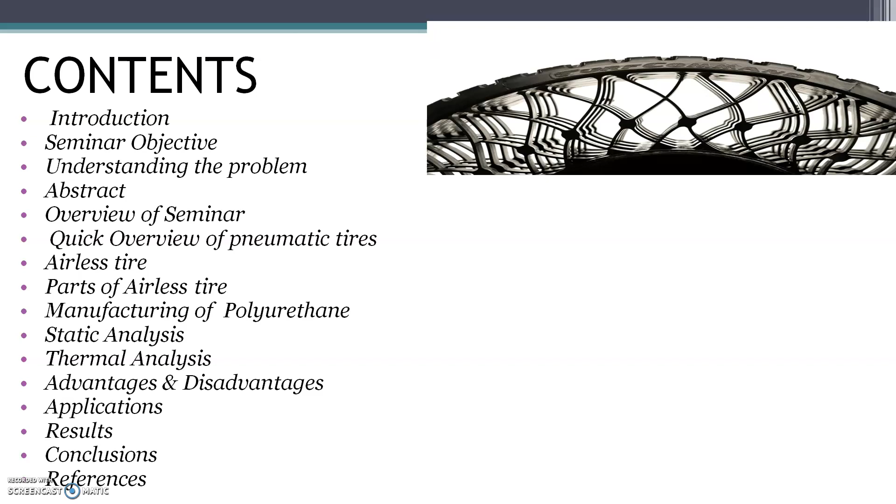Introducing the topic, firstly we will go through the invention of the first car, made by Benz in 1886. With development of the car, the tire industry also developed. By 1888, the car was fitted with metal tires covered with air-filled rubber. This was the beginning of pneumatic tires, and as the industry progressed, treads were added in 1905, synthetic rubber in 1931, tubeless tires in 1947, and radial tires in the 1950s.

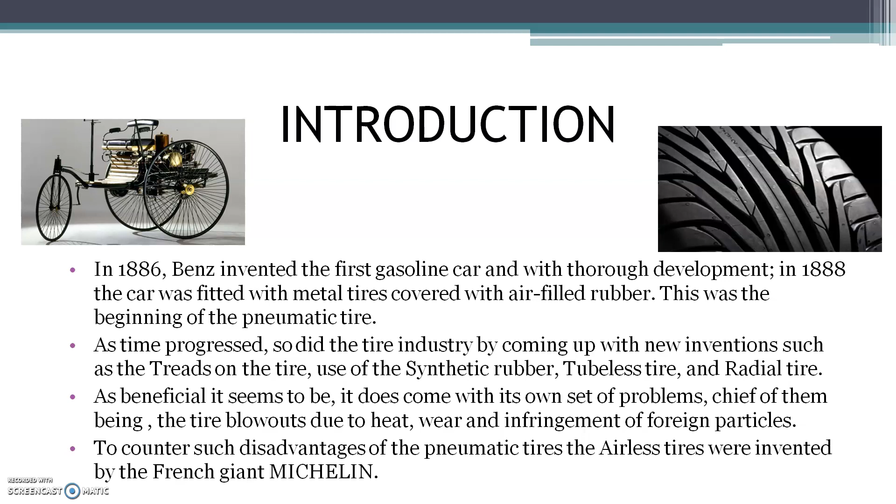But as beneficial as it seems, pneumatic tires do come with their own set of problems, chief among them being tire blowouts due to heat, wear, and infringement of foreign particles. To counter such disadvantages, pneumatic tires were replaced with airless tires by French tire giant Michelin.

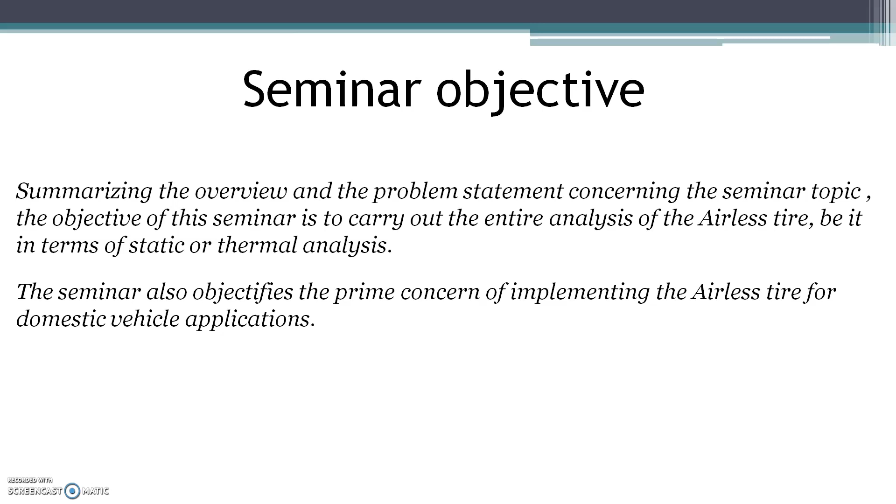The objective of this seminar is to carry out the entire analysis of airless tires, be it static or thermal analysis, and it also has a primary concern of implementing the airless tire for domestic vehicle applications.

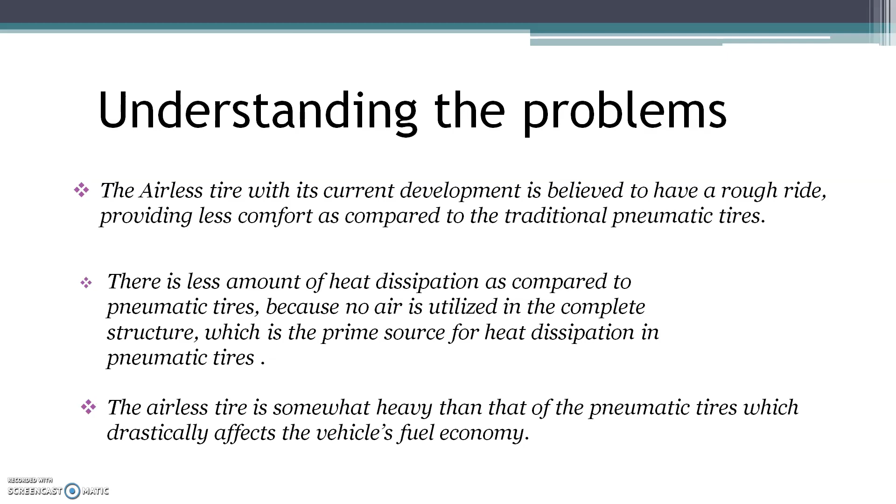Understanding the problems with airless tires, which firstly has to deal with the rough ride it provides. Apart from the rough ride, it also has a heat dissipation problem, which is a prime concern if it is going to be implemented in the domestic field. And the airless tire is somewhat heavier than pneumatic tires, which drastically affects the vehicle's fuel economy.

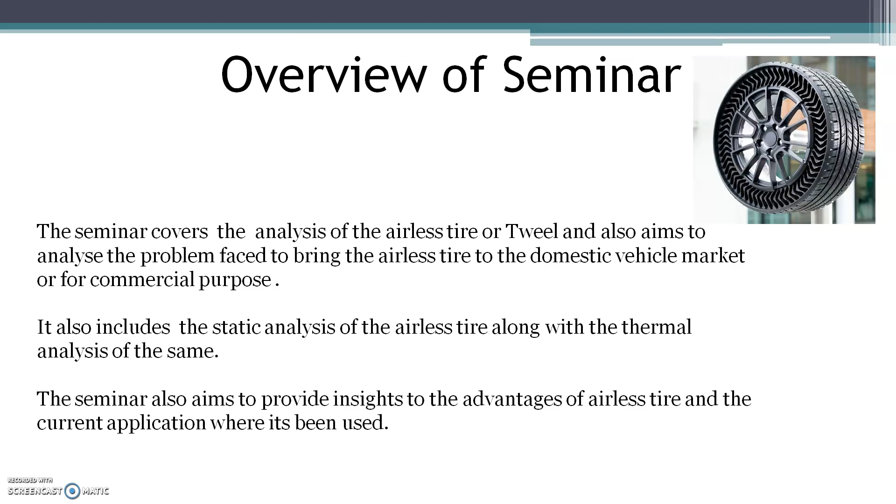The quick overview of pneumatic tires mainly comprises the basic design, which is very much similar and known. It holds pressurized air and is covered with layers of rubber. The main reason for using pneumatic tires in vehicles is their deformation property which occurs during rotation. It also gives better traction and a better cushioning effect compared to airless tires.

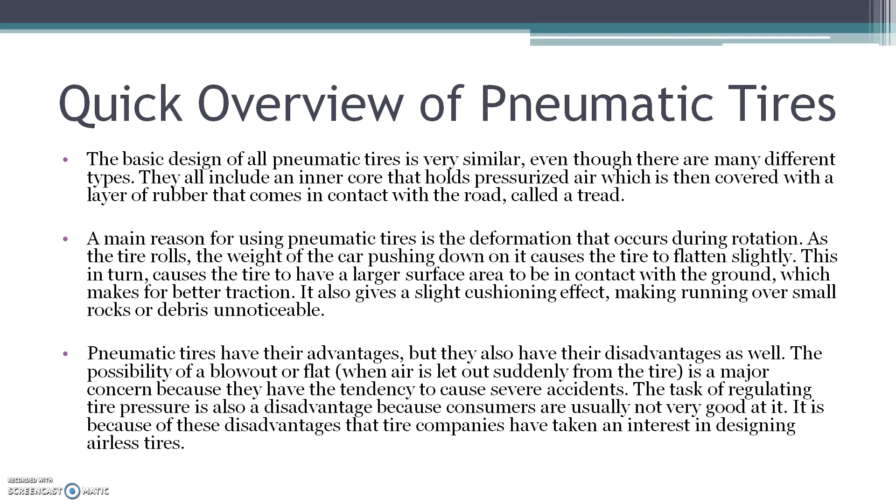But pneumatic tires have disadvantages as mentioned before, having a tendency to cause severe accidents, and the task of regulating tire pressure is also tedious, which is not always possible for every customer to look after. These disadvantages have caused the tire industry to take interest in designing airless tires.

The airless tire is the one shown in the diagram, which has the hub, a metal hub that supports the entire structure, along with the polyurethane spokes, which support the shear band and the tread band, the outer ring of the tire. These are the main parts of the airless tire.

The airless tire mainly has its designing concerns with the polyurethane spokes, which we will look at further.

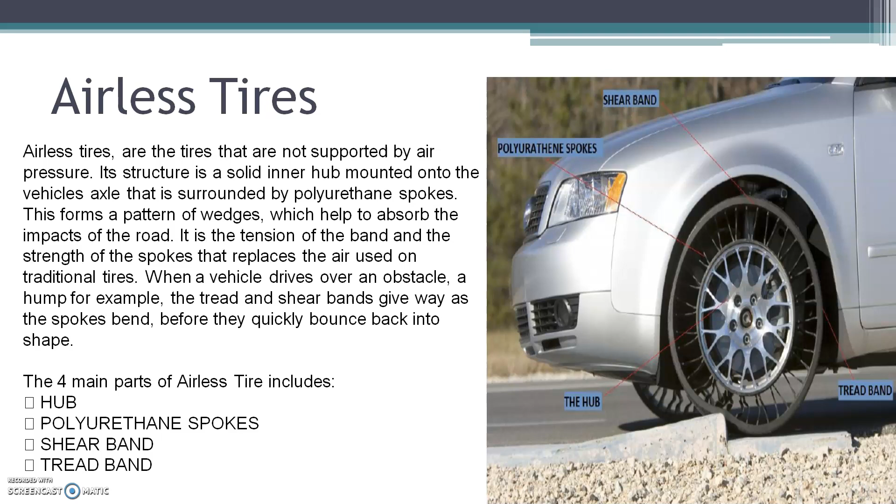After that, we will go with the parts of the airless tire. Firstly, the hub, which is made of steel or aluminum alloy. The average weight of the steel alloy used is approximately around 4 kgs, while the aluminum alloy weighs around 2.5 kgs. It is a rigid structure and cannot be deformed while running. It is formed by the casting process.

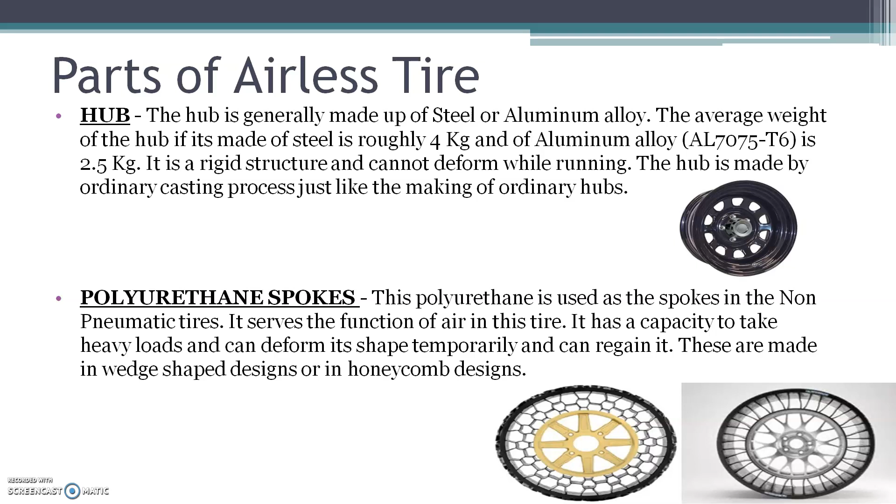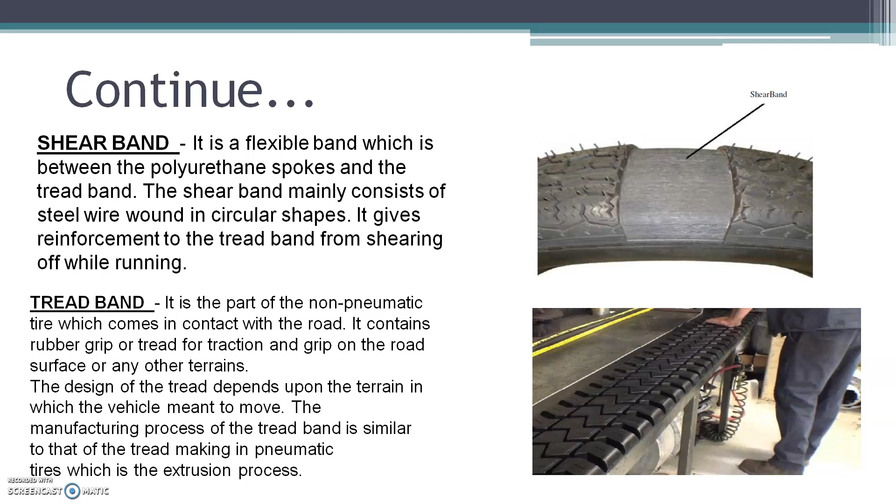Coming to the manufacturing of polyurethane: it mainly consists of polyols, mainly polyesters or polyethers, and the second component is diisocyanate, mainly comprising toluene diisocyanate or methylene diphenyl diisocyanate, abbreviated as TDI and MDI. The mixture of polyols and diisocyanates in a ratio of 60% to 30% forms the prepolymer, which is held at 70 degrees Celsius.

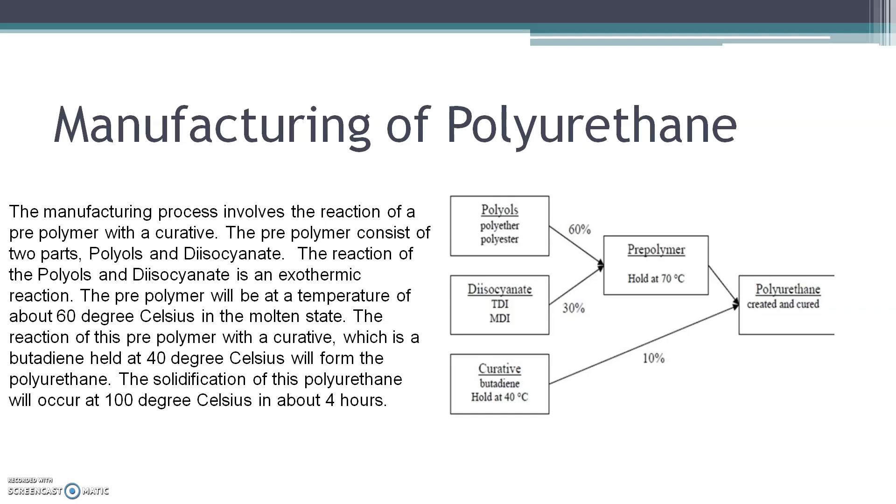The mixture also comprises a curative called butadiene, held at 40 degrees Celsius, with a proportion of 10%. The entire mixture then forms the polyurethane, which has been created for the spokes of the airless tire.

Moving on further to the static analysis of the airless tire, the polyurethane spokes are the prime structure to focus on when designing the airless tire. After many structures of polyurethane spokes, the wedge-shaped structure has proven not to be as convenient as the honeycomb structure, as scientists have developed cellular designing and proved the honeycomb structure is most convenient of all. Despite its convenience, honeycomb structure comprises its own types.

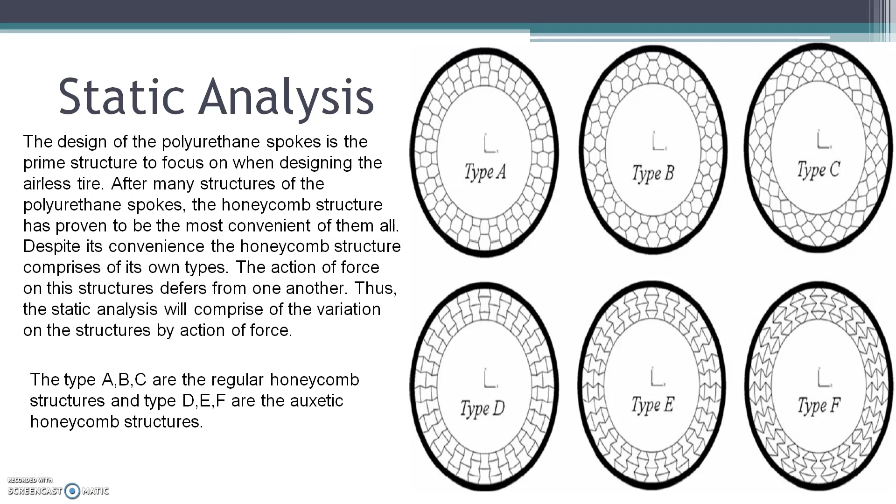Force deflection curves of the non-pneumatic tires with honeycomb spokes have negative cell angles, and the deformations are investigated for analysis. The type D honeycomb spokes, an auxetic honeycomb structure, have a cell wall thickness of 4.85 mm associated with the reference load carrying capability for the analysis. The similar macroscopic force deflection behavior is seen in the type A spokes.

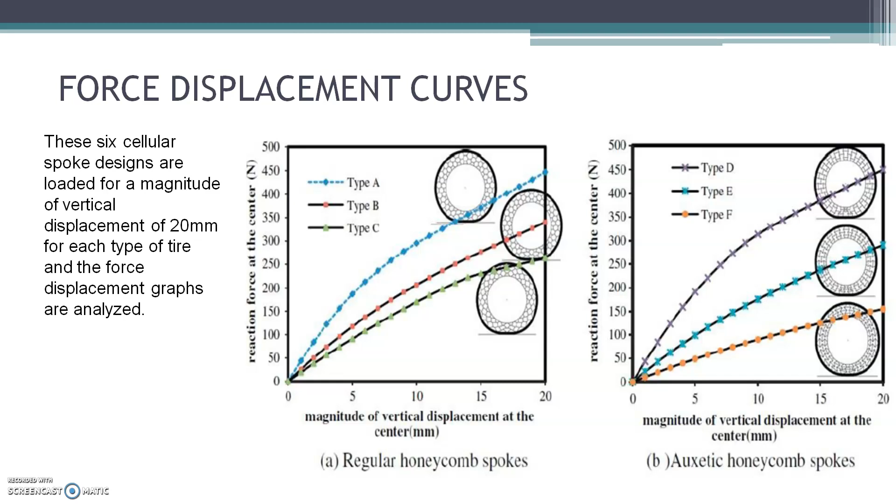The honeycomb spokes of types C and F are good for fatigue resistance, but when we consider lower mass designs, the type C spokes are much better than type F, as they have good fatigue resistance as well as lower mass design. Therefore, the type C spokes are considered convenient from the analysis. As we can see in the diagram, upper right corner, type C is the honeycomb structure preferred for the tire.

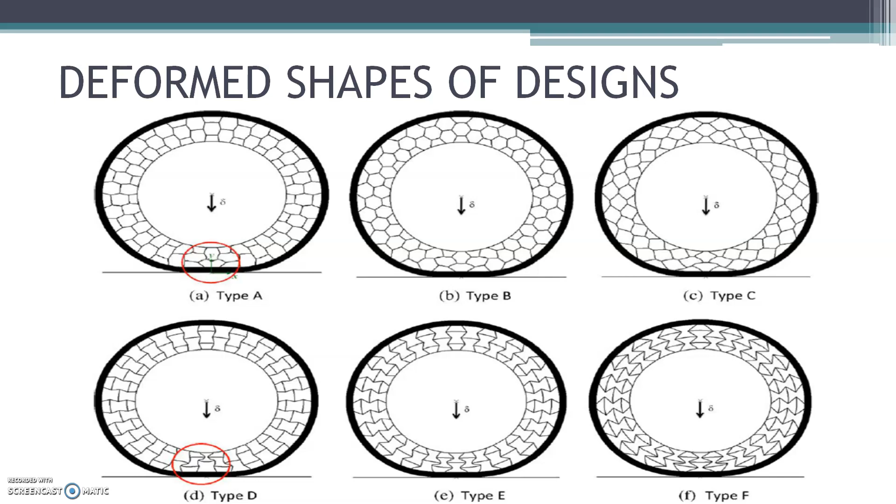Moving on further to the thermal analysis of the tire, the air pressure present in pneumatic tires is subject to extrinsic properties like temperature. The pressure inside the tube of the tire reaches 56 psi when running for an hour on a normal highway in India. To simulate such a dynamic environment, the spokes are subjected to force, torque, and pressure.

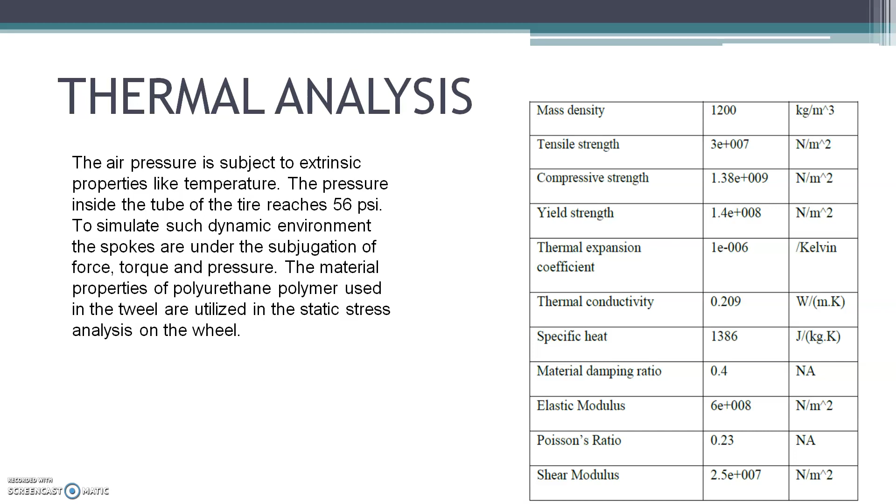The material properties of the polyurethane polymer used in the wheel, that is the tire and the combination of tire and wheel, are utilized in the static stress analysis on the wheel, which in turn gives us the thermal analysis so as to look if the tire performs well.

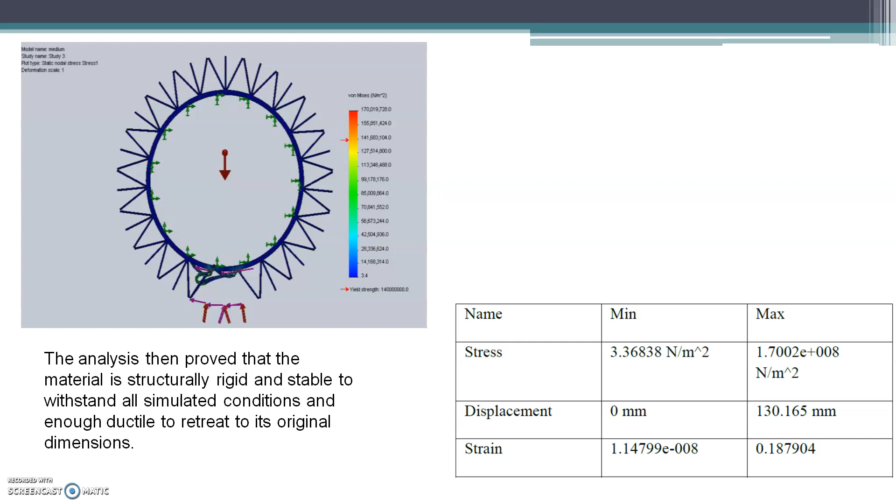The analysis has been carried out over a software and has proved that the material is structurally rigid and stable to withstand all simulated conditions and ductile enough to retreat to its original dimensions. As much study has not been carried out on the thermal analysis of the airless tire, such experiments are carried out on a small scale and are not yet implemented.

Thus, ending with the analysis, we will move forward to the advantages of airless tires, which first would be that it provides a comfortable ride and increases vehicle handling. Its flexibility provides an increase in the surface area of contact, thereby increasing grip with the ground.

It can take gunfires and spikes without becoming immobile. It reduces downtime as compared to pneumatic tires, as it requires very little or no maintenance. The load carrying capacity of the vehicle increases. The environmental impacts of the chemical content in the tire are reduced, as manufacturing of airless tires is much less compared to traditional pneumatic tires.

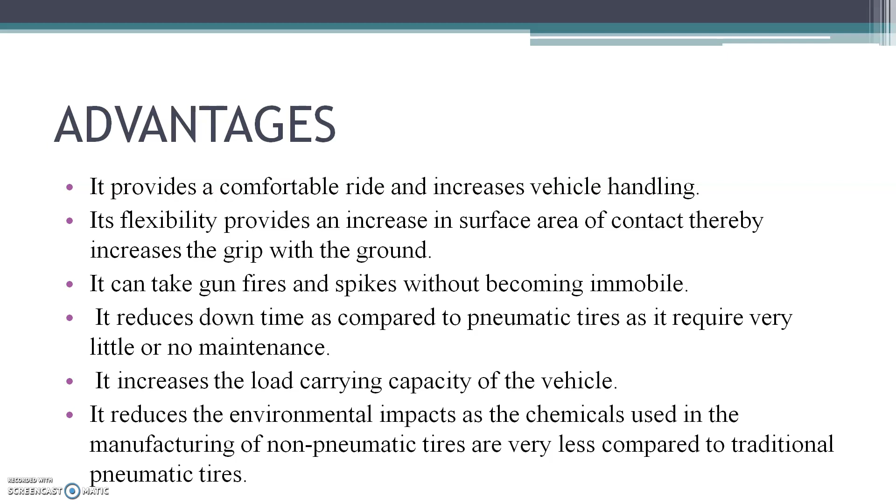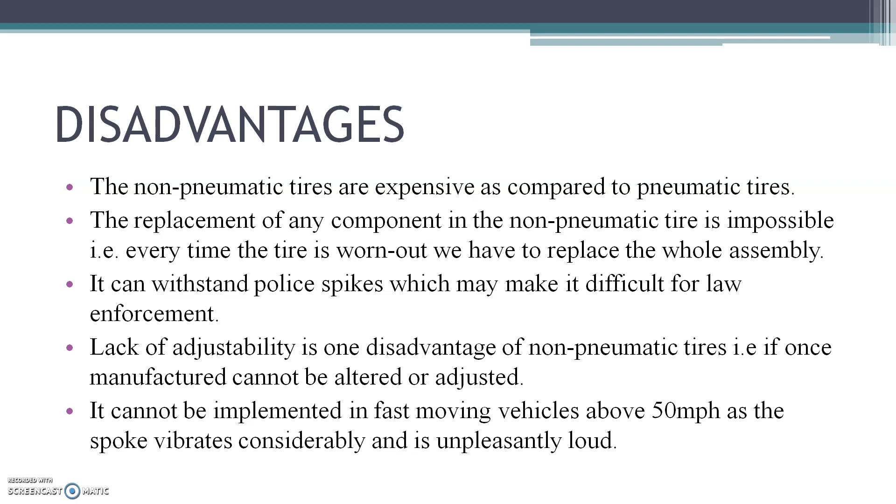Moving on further to the disadvantages, the non-pneumatic tires are expensive as compared to pneumatic. It can withstand police spikes, which may make it difficult for law enforcement. The lack of adjustability is one disadvantage.